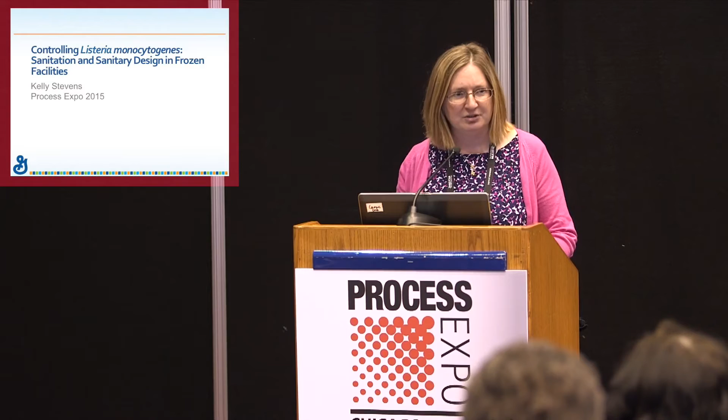It's only an hour, and this is a topic you could talk about for quite a while. So what I'm going to do is try to hit some highlights and share pictures of where we've done a deep dive into these principles, identified opportunities, and share things we've done to improve sanitary design. The reality is many of the systems in our network were designed years before people were really fluent in the conversation around sanitary design. It's a learning journey, about having the right solution at the right time for the right process and equipment you're using, and finding the right solution, but not always the best one. If I had thought differently about how I prepared today, I would have taken us on a tour of the floor as we talk about the principles. But I hope and encourage everybody to ask different questions as you interact with vendors and use a different lens as you're looking at equipment throughout the day.

So we'll talk briefly about sanitation, then about sanitary design principles for facility and equipment, and then we'll have some pictures and get the chance to be a little interactive inside this room.

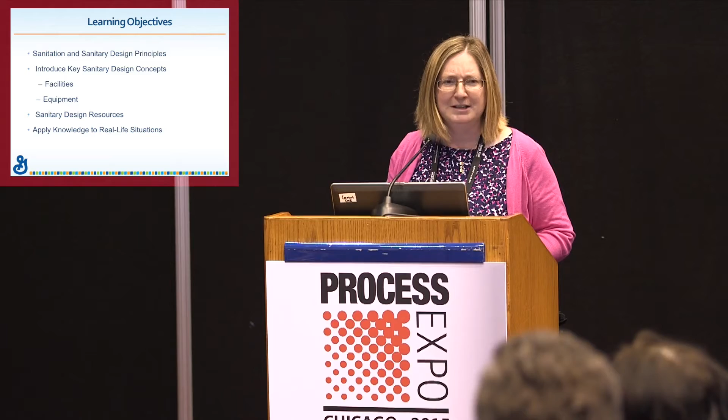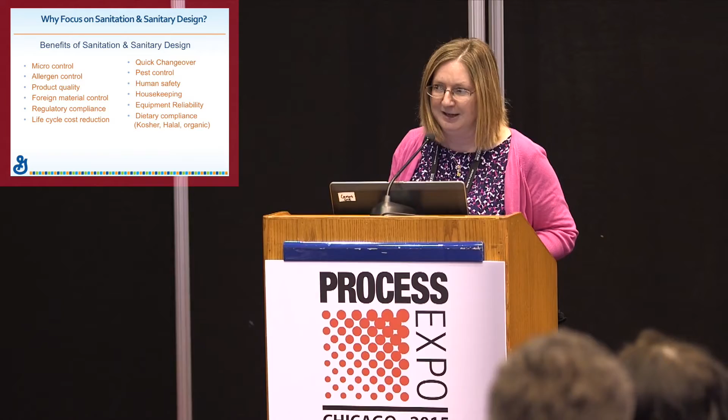I think the big question is, why would we even want to have this conversation? Why do we clean our plants? Why do we want equipment and facilities designed with sanitary design in mind? It depends on your product, depends on your process, but there are a lot of reasons. We'll focus very much on microbiological control today. I'll also talk about pests, because when you find situations conducive to pest harborage, you begin to develop opportunities for microbiological harborage somewhere else in your facility as well.

So let's start with sanitation. We talked about sanitation as we looked at a systems approach for control of Listeria. Sanitation is really all actions dealing with cleaning or maintaining the hygienic conditions of the facility. This can range from the cleaning and sanitization of specific equipment and food contact surfaces to periodic cleaning activities throughout the facility, including the building, the structure, and the grounds.

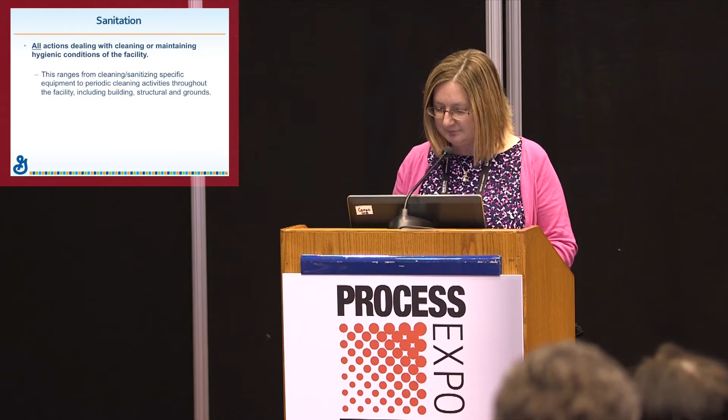We talk about wet sanitation in the 4x4 process. We were joking around during the break about how fun it is to have the hoses and to be able to spray and go at the facilities. And sometimes if you have the opportunity to be there when your sanitation crew is cleaning, it looks like a bunch of firemen sometimes.

You've got some high pressure hoses, really trying to get into some difficult places. Sometimes they're using water to move materials, and sometimes they're using water because they're just waiting for the next opportunity to clean something. But there really is a lot of science that goes into cleaning, and you need to be aware of the materials and the chemicals that you're cleaning with as you look at bringing new equipment into your facility.

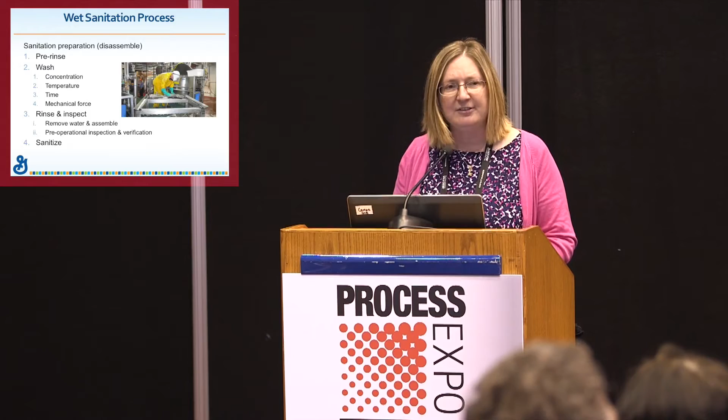We were recently challenged with how could we do 3D printing of replacement parts, and it brought up a great question around whether the material was even approved for use in food contact surfaces, and then how would it interact with the cleaning chemicals that we already had in our plants? So although the graphics and explanations of the sanitation and cleaning procedures for wet sanitation are very straightforward, there's an awful lot of science and chemistry that goes into it, and also a lot of interaction with the materials.

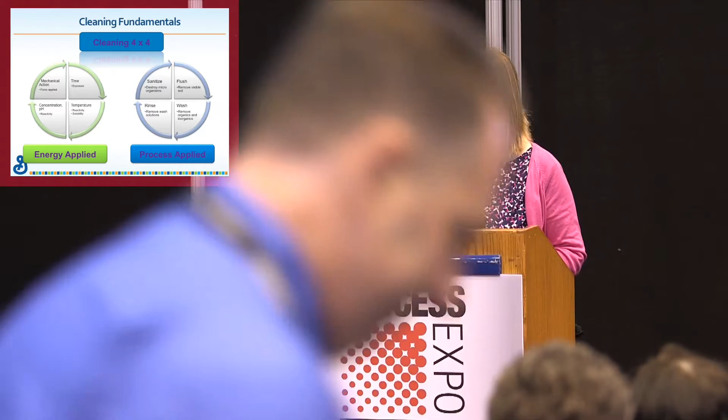Many of us know that when you don't use stainless steel in the facility, we have to then manage some of the outcomes of that. Nothing like that aluminum system that sits in your wet wash area that eventually rusts by day 2. And then how do you manage that chemistry?

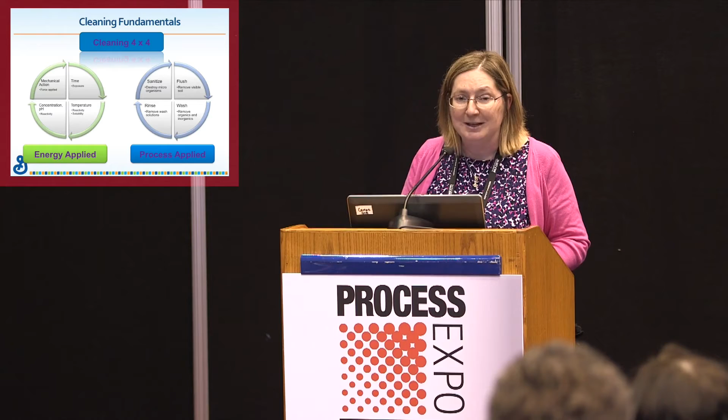So again, it's that interaction of the two, because as I think about putting equipment into my facility, as I think about building a new facility, at the end of the day, I want to be able to clean it effectively, and I want to be able to have a procedure from the people doing the cleaning that is safe for them to execute, and they can do so in a way that's repeatable every time and sustainable.

Hence, that leads us to the importance of sanitary design. I was talking to somebody earlier today about this term, and it really implies that you have an engineer in an office that's very, very clean as they're designing the system. Well, that's not really what it means, right? It's about the application of design techniques to allow efficient, effective, and consistent cleaning of your entire system, not just the food contact surfaces, but the system, the facility, and the grounds.

Some would say if the operator and crew can't see it, they can't clean it. So think about all those hidden surfaces. The microbiologist in me loves to take things apart. The operators hate it.

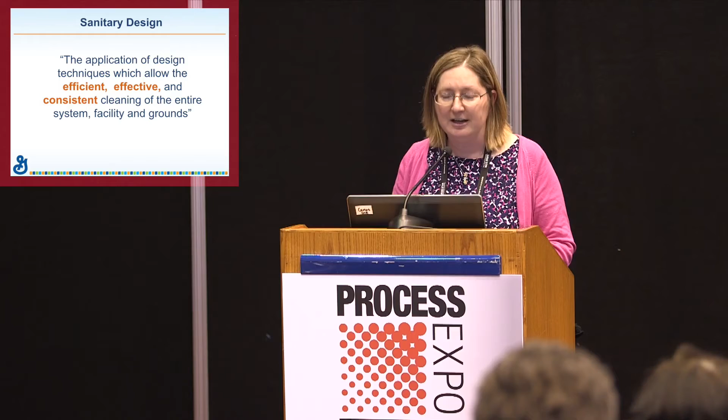So when you think about the fundamentals of sanitary design for both facilities and equipment, the goal is to create that environment that's easy to maintain under the required sanitary condition. We want to start thinking about sanitation at the property line. We want to specify materials that are easy to clean, and we want to design for the expected life cycle of the facility. When we think about putting in equipment, some of that equipment is around for decades, and we still need to be able to effectively clean and maintain it, and maintain that sanitary nature throughout every product that we make on that line.

So the first set of sanitary design principles that I'll talk about today are the sanitary design principles for the food manufacturing facility itself.

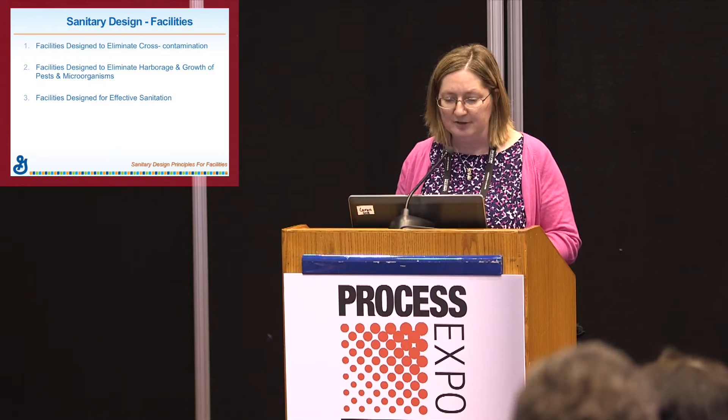So when you study these design principles for facilities, you'll notice there are really 3 themes. First, the facility should be designed to eliminate cross-contamination. We talk about linear flow from raw to finished product. Facilities being designed to eliminate harborage and growth of pests and microorganisms. We don't want the rats, we don't want the lizards, we don't want the birds. As we know, we also don't want the Listeria. And we want it to be designed for effective sanitation, right? People are tasked to do this cleaning, sometimes under not the greatest of conditions. We want our people to be safe, we want the food that we make to be safe.

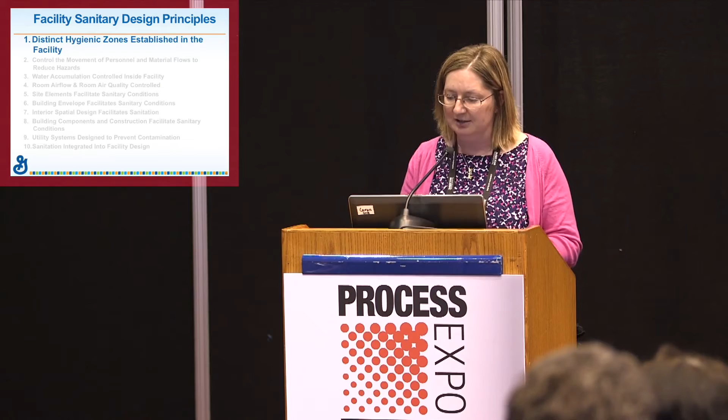So again, we'll use today as a starting point, and I'm going to share some pictures as well. The first principle I'll cover today is distinct hygienic zones in the facility. So when you think about hygienic zones, you think about that movement of materials from raw to finished product. You think about maybe separation of cooked and uncooked, ready to eat, not ready to eat. You think about how you transfer a hazard along that line, movement of people, movement of materials.

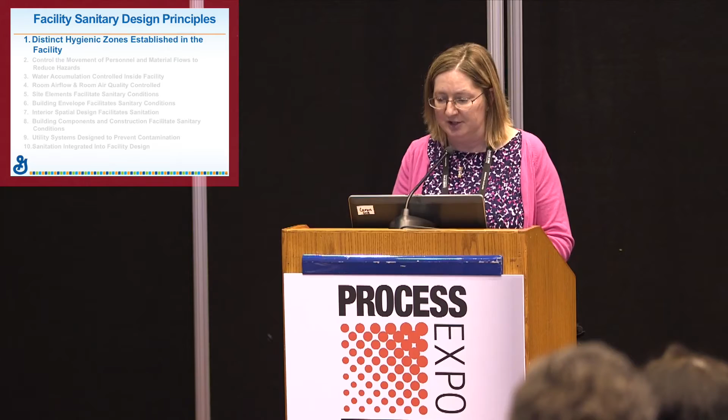Now, as we know, those of us who have worked in manufacturing facilities, stuff happens, right? You're relying on somebody to remember to do this. Oh, and by the way, they got sick and we have 3 temporary people in today. We're relying on people to remember to cover it well, and then remove it in a fashion that will not add to contamination. Is there a better way?

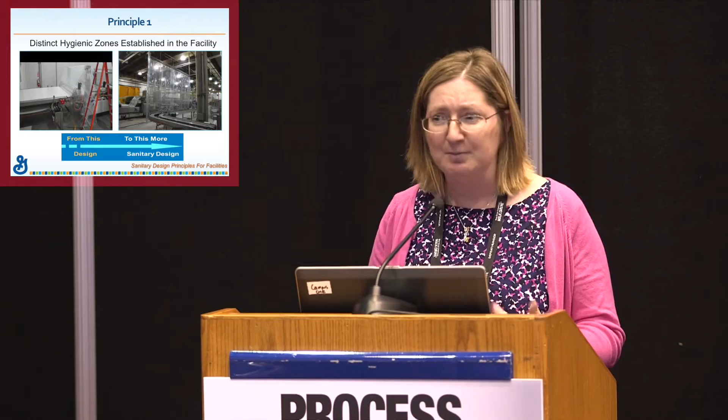Well, the picture on the right is a really good example of a sliding curtain. With a well-constructed side rail, the plastic material provides protection, but it also allows operators to see what's going on both sides, right? People want to know what's going on around them, or sometimes they have a responsibility for both sides. So again, from left to right, you go to a more sanitary design.

The plastic sliding curtain is a good mitigation technique, but there could be better alternatives. It's about understanding what your facility needs, what processes you're trying to run. Another solution could be a permanent wall, again, depending on what the needs of the facility are.

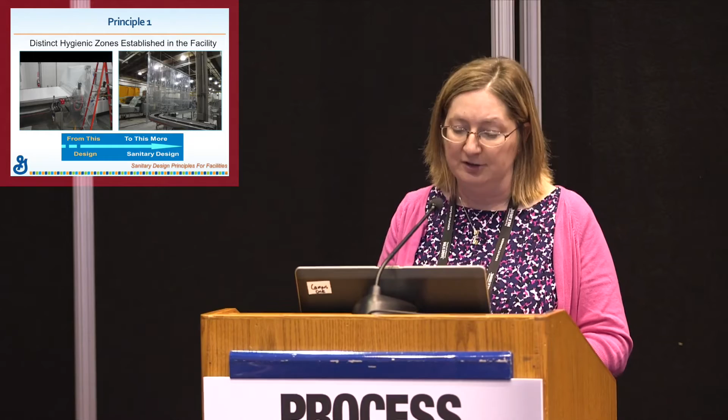But guess what? That dry side's not staying so dry. Those dry hygroscopic ingredients are getting sticky and nasty. Not only is it creating a microbiological risk, it's really hard to clean.

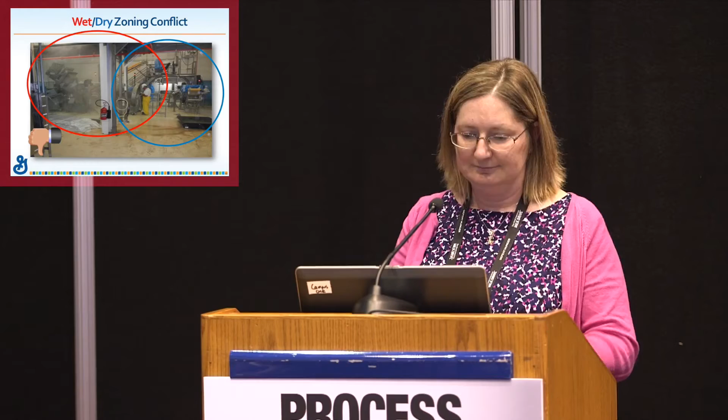The next sanitary design principle I'll talk about today is about water accumulation controlled inside the facility. Now, when I think about our frozen food facilities, these are wet processes. Water is used for conveyance. Water is added post-freezer to help against freezer burn. And there's a lot of different steps involving water.

That being said, making sure we're designing the facility so that floors are sloping appropriately. Has anybody ever been in a facility where you have a floor drain that's high in the floor as opposed to the low point? Really not doing us any good. Water's pooling. That's what this design principle is all about, making sure you're constructing your infrastructure to support the water movement needs and avoiding the accumulation of water.

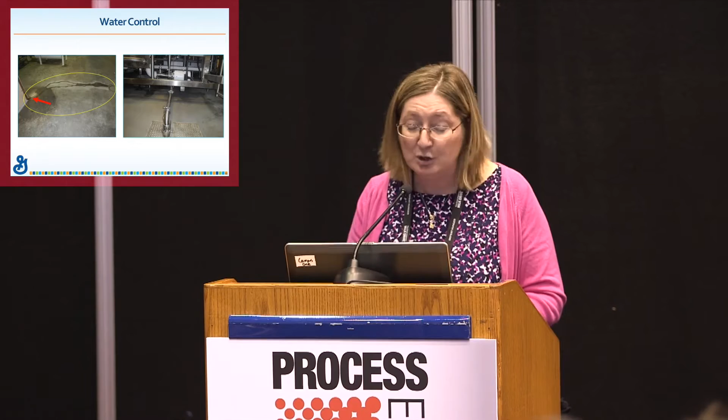Now what you see on the left is probably, as an auditor, one of my biggest pet peeves when I walk through one of our manufacturing sites: the hose on the floor. The hose on the floor that will be used to spray potentially a food contact surface. The hose on the floor that I'm swabbing for pathogens. The hose on the floor where we just saw the puddle and the accumulation. On the right, a better solution, although maybe not the best solution, but the hose is up off the ground and the nozzle is not laying on the ground.

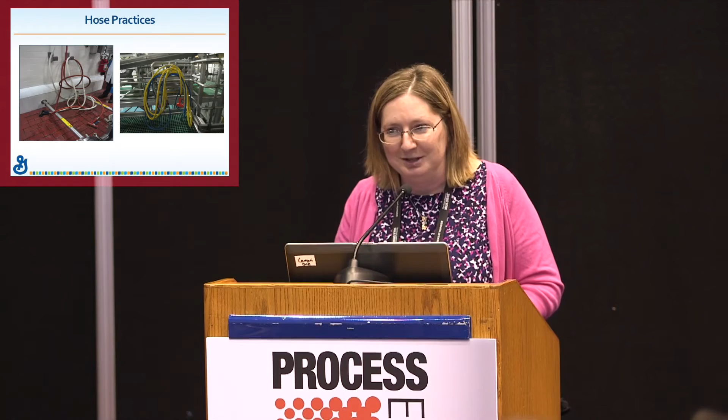People are always surprised when I talk to them about the potential of those hose nozzles being a source of cross-contamination for Listeria, and I've sampled many of them, and I've gotten many positive results back. We throw the nozzles out just as an awareness. When we do the sampling, we throw those nozzles out and change them out. Because sometimes 3 days later, after the corporate microbiologist leaves, people forget what hose she sampled.

Condensation. Every plant I go into, we look for condensation, especially over a product zone. It's really, really hard to manage, really hard to justify. How do you prevent it, and what are the tools and tricks in your design for heat transfer that you're building in when you work with your engineers?

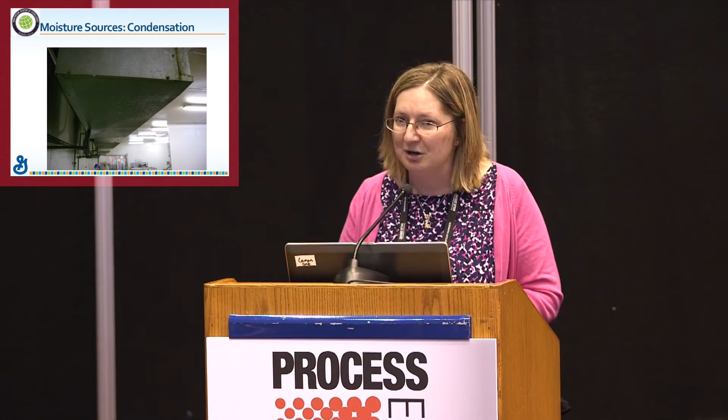Freezers. We talked quite a lot about freezers in the last session. Freezers have been known to be a potential source of cross-contamination for Listeria. As we look at water control, we look at ice buildup, we look at the defrost cycle. Where is that ice all going to melt and go? How do you clean that? Where is it?

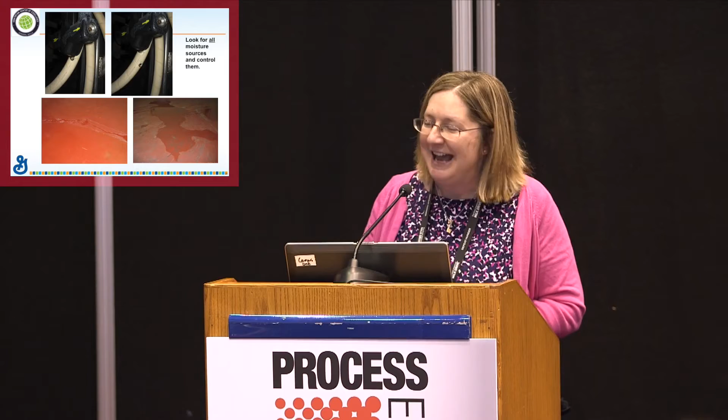And if I didn't talk enough about hoses, we managed to find some leaky hoses captured in the moment. So what you see is not only the hose providing unwanted water to the environment, you see the pooling of water on the floor.

Far away is the drain. If you look closer, as you go to the drain, you might see a crack. Now, what some people will see when they see that crack in the floor in their infrastructure, they'll say, we need to fix that, but I've got 17 other things to fix today. When I go in a facility and I see a crack, I just imagine all the bacteria living in there. My Q-tip barely fits in there, but I know they do.

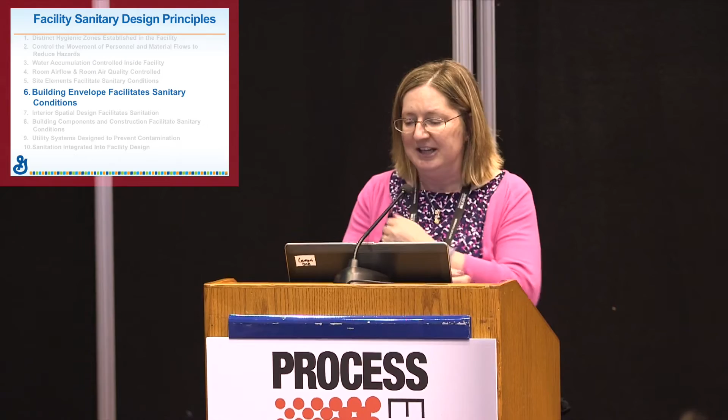So let's talk about the building itself. We talk about designing and constructing all openings in the building itself so that insects, rodents have no harborage, no birds. We want to make sure that those components are easily cleaned and inspected, free of cracks, free of voids, not welds. Welds are fine.

How many people have walked on the roof of their facility? I love going on the roof. So you go on this roof in particular, and there's bird feces. And on the right, you have cooling water. How do you clean the roof? How do you clean your shoes when you go back in the facility? What if you just tracked back in?

I know of a great story about what is really the likelihood of this. I'll share with you a story that happened at a facility I work with where we had a finished product salmonella positive. We were really pondering, where would this happen? How could this happen? We've never, ever had it happen before.

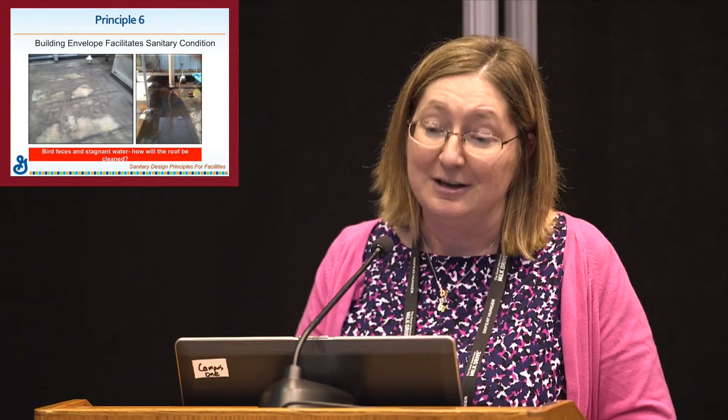Yeah, I saw as I walked in, somebody was producing or advertising a solution for bird control, so I need to stop and visit them on the way out. We want to make sure that the building itself doesn't provide nesting areas and roosting areas. After the experience I've had, I'm especially sensitive to this. The other thing I ran into at one of my facilities is some birds are protected. Once they take up roost, you're really not allowed to get rid of them. I don't want to endanger the species. I don't want to endanger my food. It's a precarious balance.

All right, I'll try not to dwell on birds anymore.

Interior spatial design facilitates sanitation. What does that mean? Some principles covered here are aisles wide enough for maintenance, sanitation, and materials, and sufficient access to clean the building. Can you actually get to stuff?

With production space at a premium, we want to get as much into our buildings as possible. But we also need to be able to navigate around and effectively clean them.

We also want to look at those floor, wall, and ceiling interfaces. Are there areas that can produce or wind up having harborage spots for pests? We focus so much on product zones that sometimes we forget to look up, and we underestimate just how far those high pressure hoses can spray. They make it to the ceiling, and what they bring down is sometimes really not what you wanted.

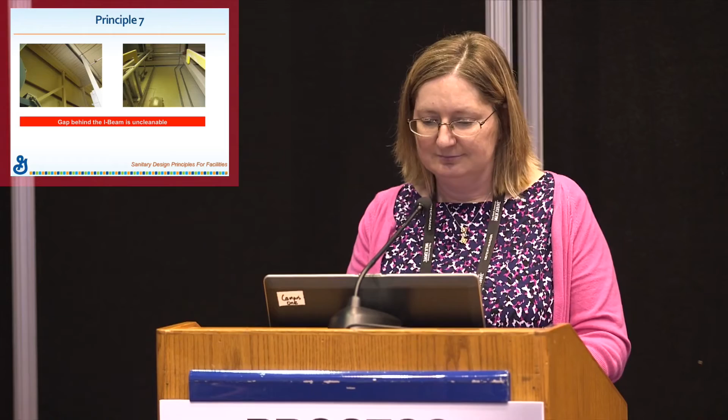So remember to look up as you're walking around the facility and look for those areas that are harborage points for pests, product, dust.

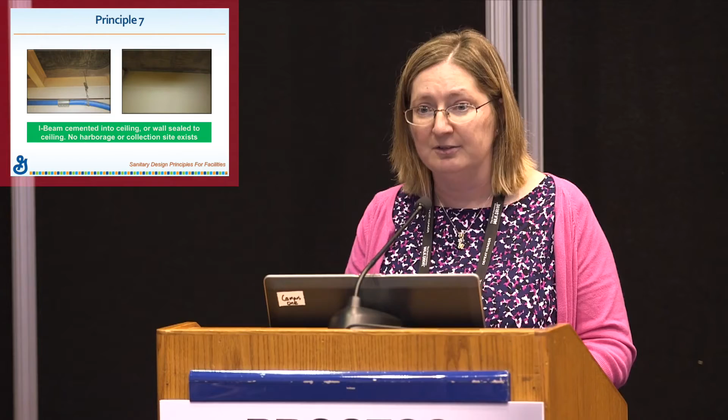In this picture we have some nice examples of those interfaces. You see the I-beam cemented into the ceiling, the wall sealed to the ceiling. Better design. Initial cost is probably going to be a little bit more, and your project engineer might not like it, so you have discussions around what it takes to clean. Long-term maintenance costs are probably going to offset the cost of bringing in a contractor to clean it under the other conditions.

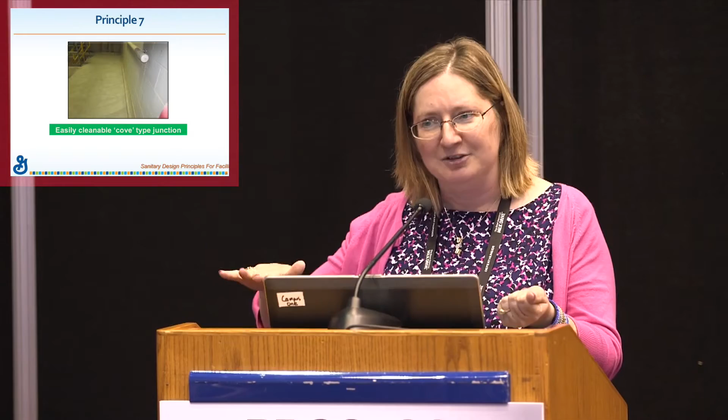In many of our incidences where we've really struggled to find the root cause, we've peeled back some flaps and found that harborage was getting wet during sanitation and then winding up in the drain. Caulk, caulk, caulk.

Utility systems designed to prevent contamination, right? Our surfaces should be cleanable to a microbiological level. Are they using appropriate materials? Is there access for cleaning? Is the water going to the right place? Back to that water theme again.

How about the lighting? Can you actually see? Is it bright enough? Anybody ever been in a production facility where it was a little bit like a cave and you wanted a spelunking light? Or how about the facility that did a great job adding additional lighting, but it was glass, and it didn't have the appropriate sealant to make it shatterproof. So good reminder around our glass and hard brittle plastics as well.

Done with the best of intents, right? They needed to build a wall because they wanted a physical separation between two lines. Great idea. They were moving away from that temporary plastic sheeting. Nobody actually walked out there to see where the drain was. The wall eventually started to erode, and needless to say, there was another harborage point. The first reaction was, well, it's a wall, it's really hard to move. And once you have Listeria in there, it's another conversation.

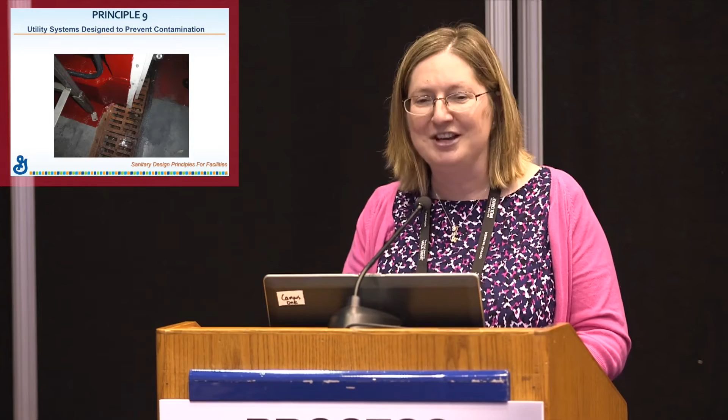So that's our very rapid tour of facility design, making sure our facilities eliminate the potential for cross-contamination, eliminate those harborage points for growth of pests or microorganisms, and are designed so our teams can clean them.

So let's move to equipment, and we are in an equipment playground.

Again, sanitary design for food processing equipment is an easy concept, right? We should be able to clean it. As we all in this room know, it's really challenging to implement.

The design principles focus on two key parameters: constructed to ensure effective, efficient cleaning of the equipment over its entire lifespan, and designed to prevent microbial or pest survival, growth, or reproduction on both the product and non-product streams. Simple enough, right?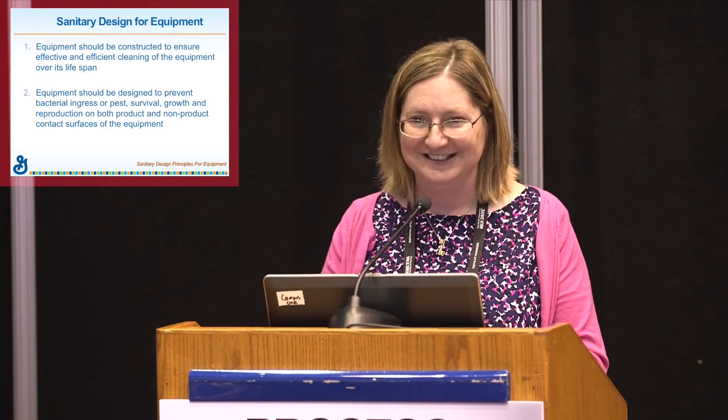So again, there are 10 sanitary design principles. I'm going to focus on 3 of them today. Each of these principles have multiple components, so you might want to get your checklist out. I'm not going to cover them all, but there's lots of great reference material out there.

Is it cleanable? That's the very first question we ask. Equipment should be constructed so it's cleanable to a GMP level, meaning biological, chemical, and physical. We want to make sure that when we bring this equipment in, we can effectively get our material off of it.

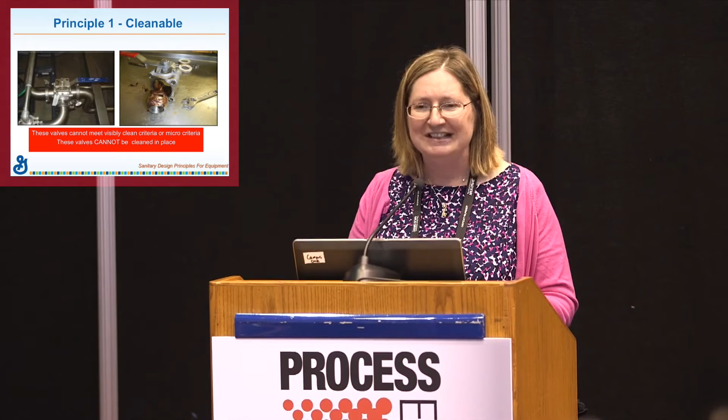Butterfly valves, they are so fun, right? They are great, they serve a great purpose, but again, you need to tear them down in order to get to the components that are going to cause you problems later.

And it's not easy. My team's always lost a part, and my maintenance man was mad because we kept using the same part over and over again. So that's when I said, well, maybe we could put an inline valve in that's cleanable. How many years would that payback take? There are sanitary valves that can, if you have a clean-in-place system that you can use, and they work really well.

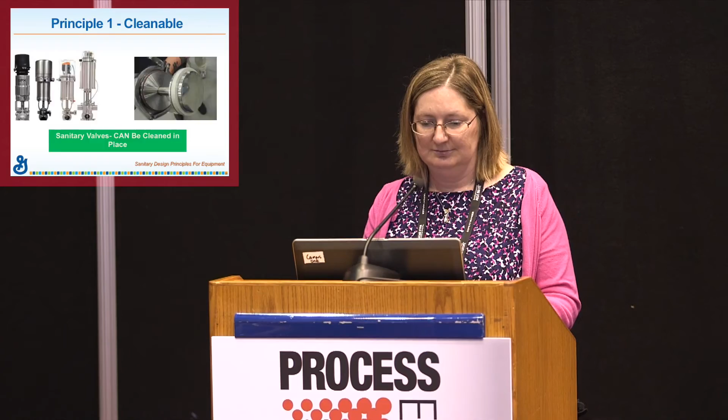However, when we asked maintenance to take this apart, we found a lot of debris post-sanitation in an area that we didn't expect. And in this particular case, it actually was an allergen issue. So we had to do quite a bit of work to remediate and redesign this tank and put interim procedures in place. The really hard thing around this particular site was the tank size was so large, it was a confined space. So we really had to think through not only the food safety, but the human safety as we were addressing this issue.

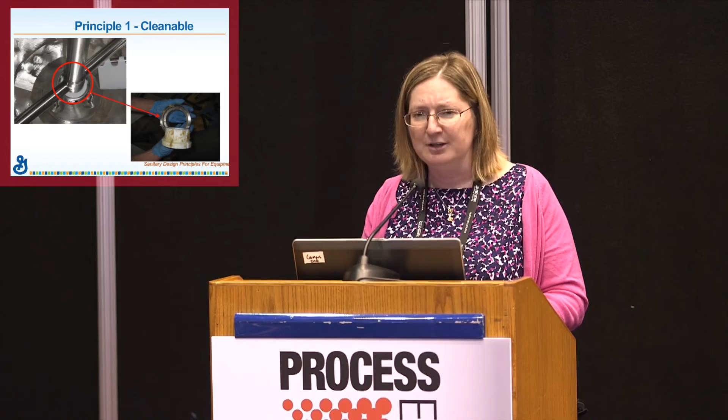Moral of the story is, every once in a while, take things apart. In this example for Principle 1 in Cleanable, it's about the scraper bar. On this particular scraper bar that you see up top, bolted in place, you need tools to take it off. Not a great design. When you take it apart, where those mated surfaces were, all kinds of food in there. And let me tell you, it smelled. So, not a great design.

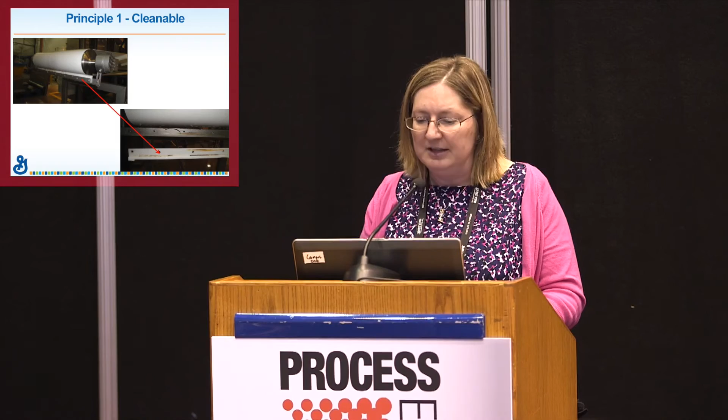In this picture, we have the alternative solution that we went with. It's a snap-in, snap-out scraper blade, no tools required, so people can get in there, get it out, get it clean, and get it back in place fairly easily. Still a little bit of debris that we found in there, but not nearly at the level of the other design. With the ease of it being able to be taken apart, it was a really good solution for our teams.

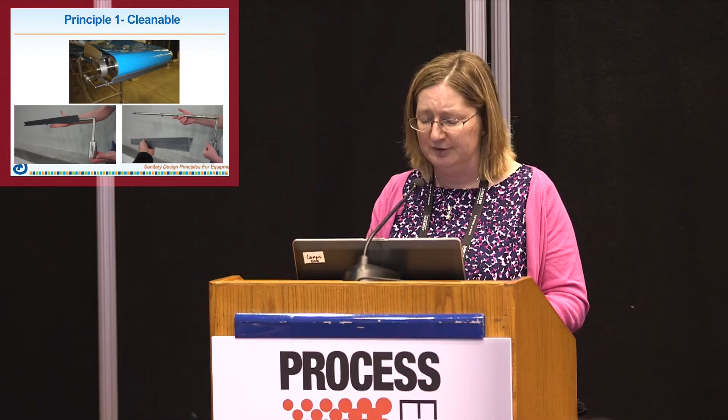All right, let's move on to the next principle: accessible for inspection, maintenance, and cleaning and sanitation. Pretty obvious, right? We got to be able to inspect, we got to be able to get to it.

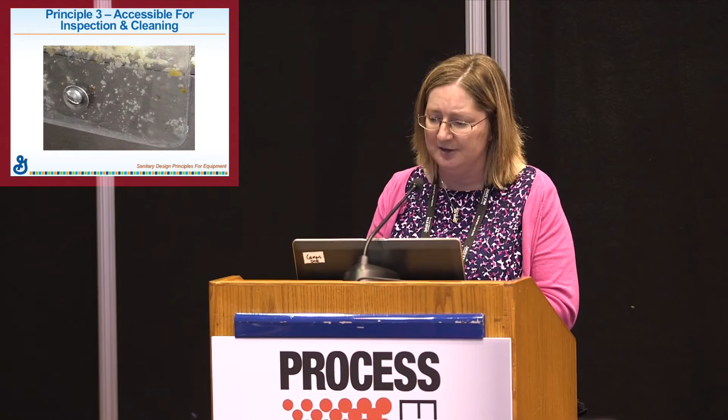So great solution, right? It's clear, I can see it. I can see the debris that's there. Maybe some mold growths, we got some pretty colors of the rainbow going on there. It's a great example of what we see a lot in our facilities: two different surfaces mated together, joined together, create a harborage point. Not easy to take off. You need to carry that tool around with you.

So again, was that the best place to put that particular unit up? They maybe could have put it somewhere else.

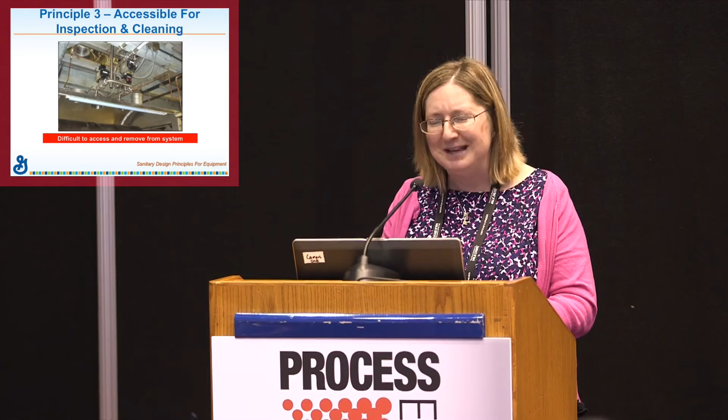Hollow areas eliminated or sealed. This one is so easy, right? It's a great one when you're walking through a facility to really look at what are some things I can get at right away. Those hollow areas of equipment should be eliminated wherever possible or permanently sealed. So you think about bolts and studs, you think about nameplates being continuously welded.

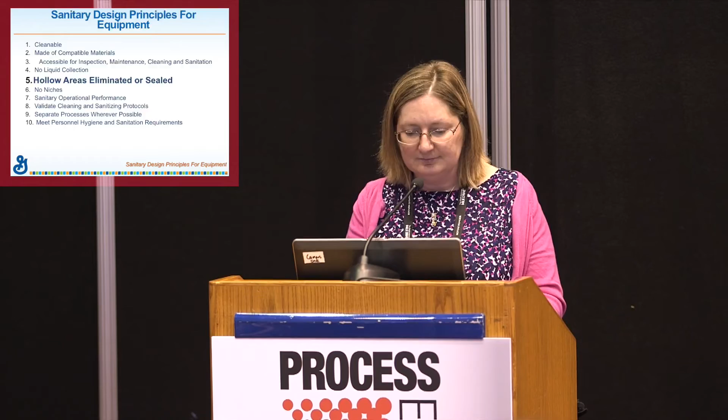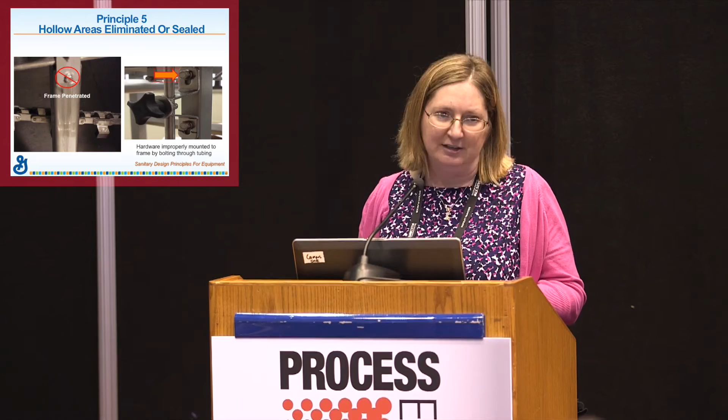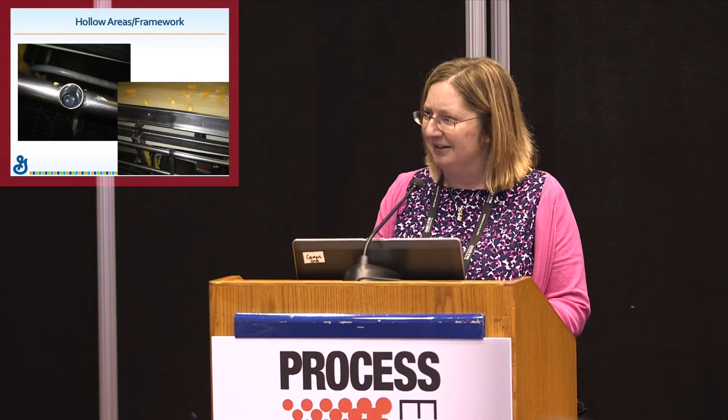So when you think about equipment, you think about cleanable, you think about being constructed to ensure effective and efficient sanitation, preventing recontamination. You want to prevent the harborage area of these pests, these microbes. Again, it's a really easy concept, but it's really difficult to implement.

So, as we think about these principles, I encourage you to find the checklist, to read them, study them. I would do it as you're walking through the show over the next couple days, as you're talking to equipment manufacturers. Ask them what they're doing with sanitary design for their equipment. How are they implementing it? Look in the equipment that's here today. Look for those hollow areas. Look for those pieces that need to be disassembled using tools. Ask them how they clean it. Ask them if they've ever tried to clean it.

I am on a personal mission at my company that every project manager, I want them to clean their own equipment. I am on a mission. I'll take one, but as a start. Because as they put it in, they need to understand the ramifications for the next time they design.

All right, so I've talked a lot. My throat's getting a little sore, so I'm going to turn this over to you guys now, and I'm going to share some pictures, and I want you to think about design or execution. We talked about sanitary design principles for equipment. We talk about execution of the sanitation. So let's see what we see in the pictures.

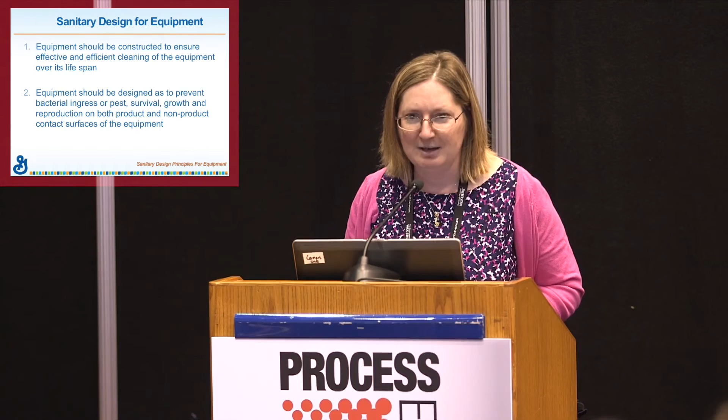I'm being told I'm not loud enough. Oh, we have a microphone. Excellent. All right, first picture, what do you see? I'm sharing them. Come on. What do you see in this picture? Donna will call on you. There's no wrong answers. No wrong answers.

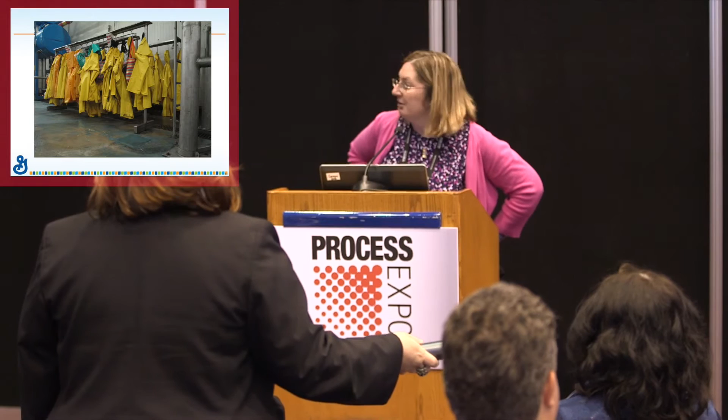So you see the raincoats and what else? Use the microphone. Water might drip and collect on the floor. They're very nicely organized, aren't they? Right, they did a nice job. They have some personal belongings. Oh, somebody in the back. They're touching the ground. They're touching the ground, yes.

Design or execution. What do you see in the background there? Anybody see the floor drain? They're hanging over the floor drain. How awesome is that? So this is the uniform that our teams are wearing to clean the equipment. They're now very nicely hanging, some touching the floor, some touching what appears to be personal materials, and who knows what's going through that drain.

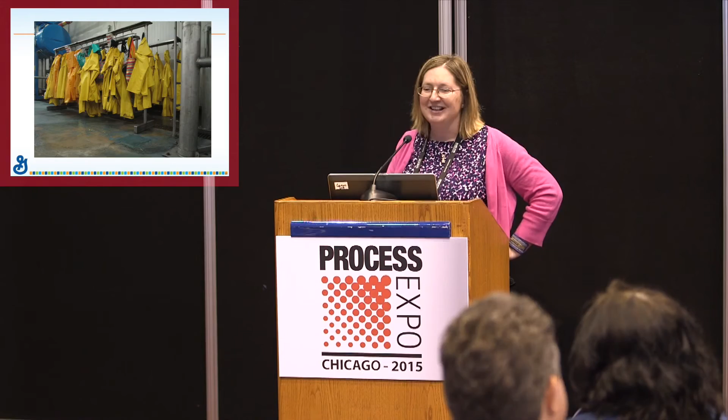Great, good. All right, let's try another one. What do you see? Design or execution? Oh. Any guesses?

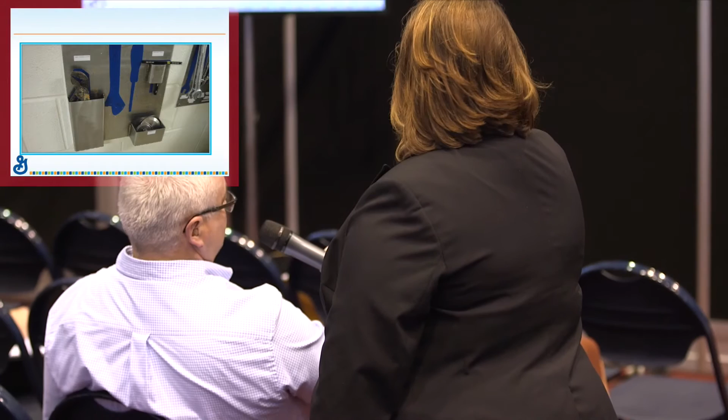It's a shadow board missing some tools. Yep, a shadow board missing some tools, so hopefully somebody's out using them right now. Right, it's very clear, poka-yoke, I know where to put it. You've got pockets for harborage where the tools are stored. Yeah, how do you clean that little square out? That wrench looks a little dirty, doesn't it? Maybe my tool didn't get cleaned before I went back. Good. All right. What do you see?

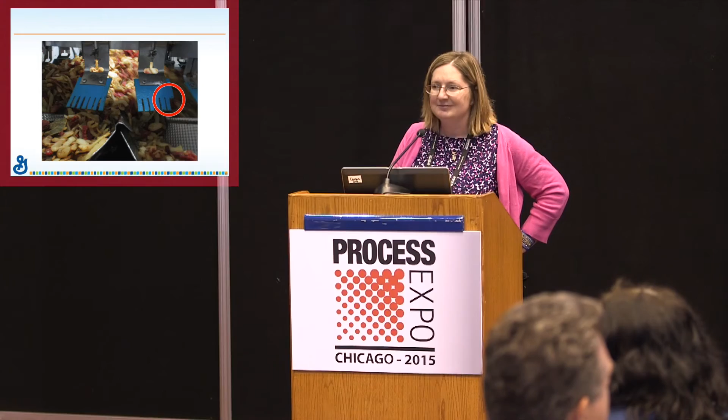Those little blue feet that can't be taken off because they're screws above ready-to-eat product. And I see the little red circle, which means one of the little feet got broken off, so it's in product. You probably ate it when you ate those chips.

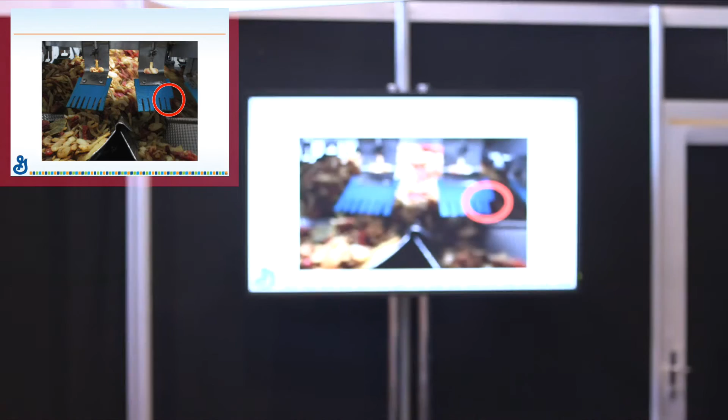And then you've kind of got the area, the ledge where old chips can sit up there, and drop into good products. So you have lots of contamination points.

Awesome, guys, great.

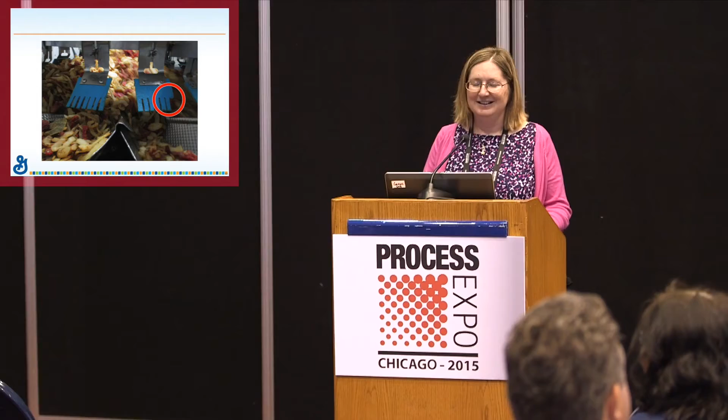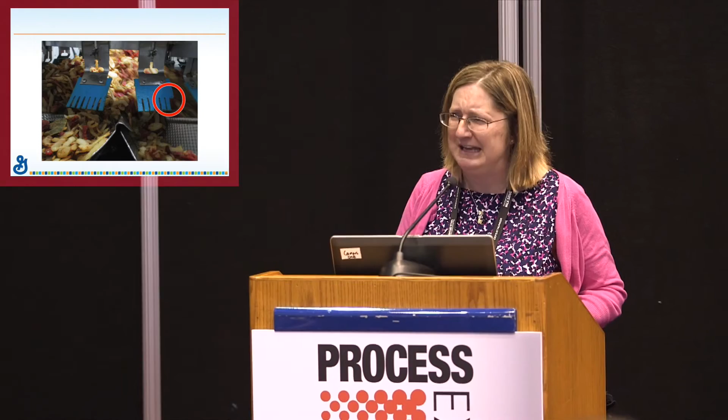Our sanitation teams, they work really hard. We were talking about this with Marty during the break. If you've done sanitation, you know it's a hard job. It's a hot, sweaty, dirty job. And it's a job that's sometimes more of an art than a science.

All right, what do you see in these pictures?

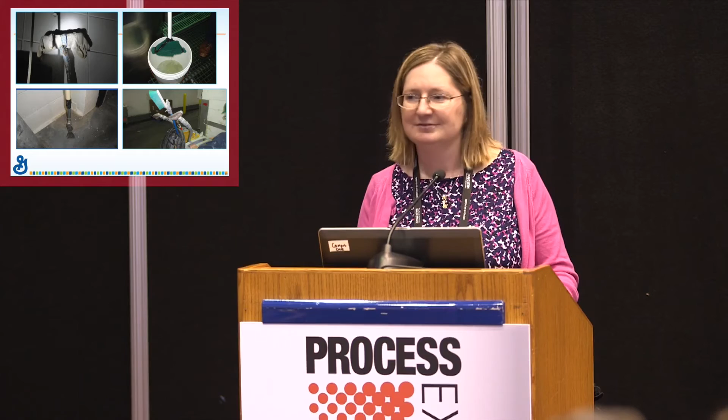What do you see in this picture?

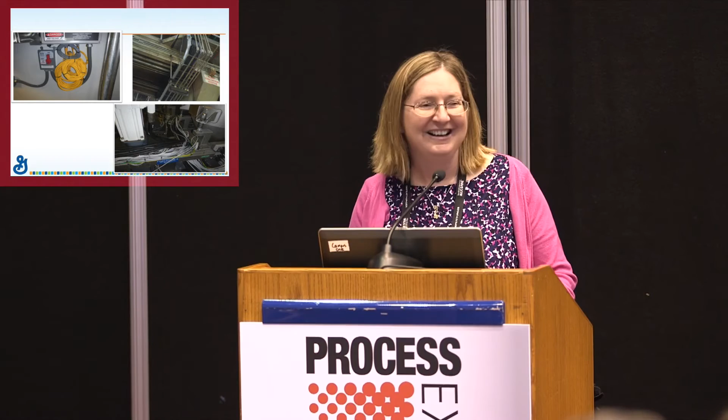All right, if somebody can help me understand this picture, that'd be great.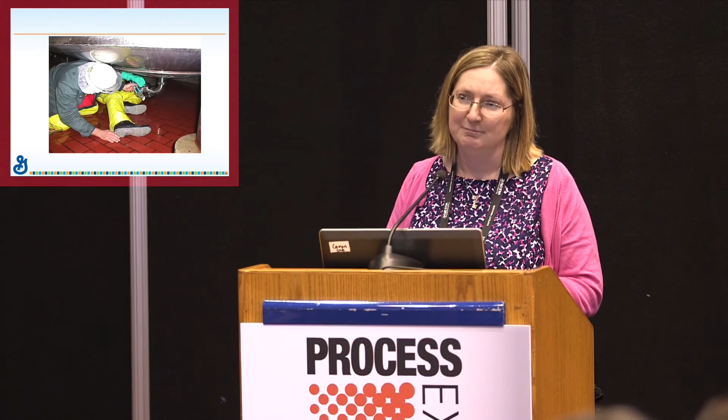Although I would say you can also go and look at your existing assets through these lenses to say, where can I improve? It's also a really good opportunity to really familiarize yourself with the tools, with existing assets, so that you know how you want to do it in the future. Use all of your resources, and at the end of the day, I think there really is a lot of value that comes from this conversation. The better we get at sanitation and sanitary design, the better we are prepping our plants to make safe product every day.

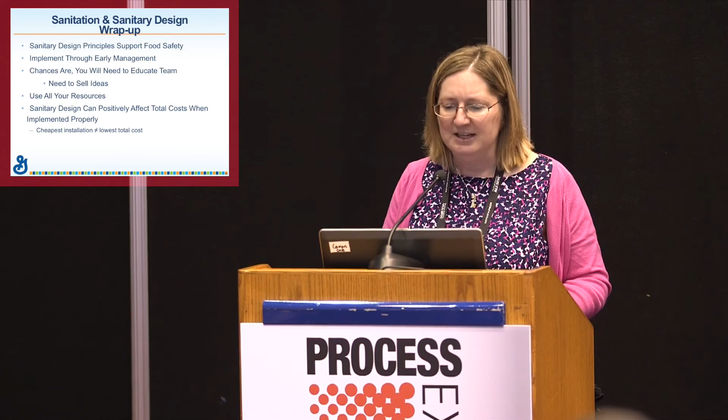Lots of reference materials out there. I encourage you to use them. Again, combination of sanitary design, sanitation execution, effective, efficient, and sustainable. And that's all I have for you today.

All right, do we have any questions for Kelly?

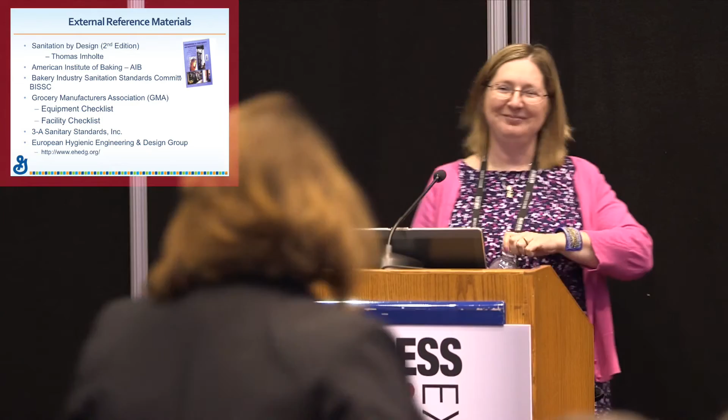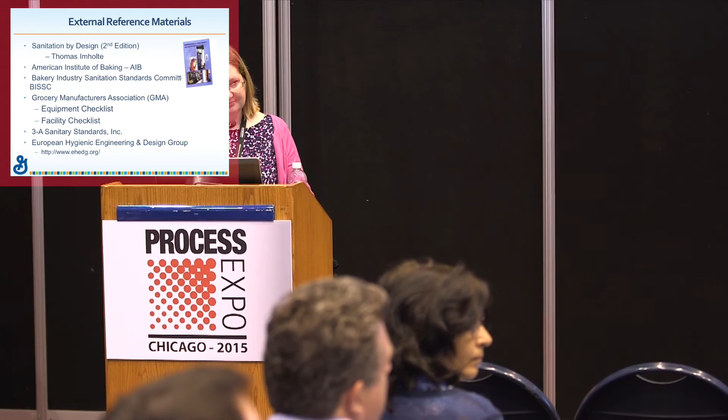So Kelly, your examples were wonderful. You could probably find them in any manufacturer's plants. So the question I have back to you, I realize you're on the quality side, but how do you take these observations from factories and integrate them into both the packaging equipment designers' standards as well as General Mills standards? There has to be a way that you see this one-off. You talked about creating a sustainable process to eliminate that, but part of that is to make sure it's a part of your design and engineering standards. So talk about that a little bit.

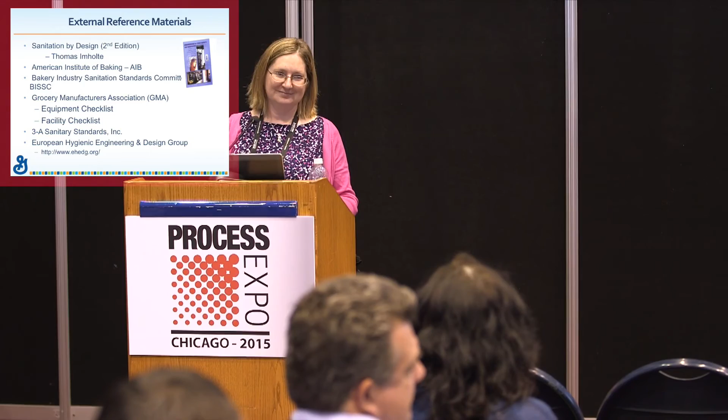Yeah, it's a really great question. As you look at these standards and the understanding and implementation of them throughout, it really starts with the people who are designing equipment and the expectations that I have as a customer for that equipment, to ensure that we're talking the same conversation. So in my role, it's really important that my best friends are engineers, and I have to learn to talk a different language with my engineering team. If I go in and say, hey, check out how much Listeria I have, they're going, what are you talking about? Well, let me help you understand the risks and implications of not being able to clean effectively. It not only has a regulatory risk, it has a food safety risk, and here's my labor implications. By having those conversations and partnerships, that helps us design what our criteria are inside, what our needs are for a wet system and a dry system, and really start putting it into our purchasing contracts.

And design reviews. We are doing that, yes. Great. Next question.

I was wondering, we've been seeing a lot of antimicrobial treatments to floors, walls, things like that. Do you have an opinion on that? I mean, is it working? Is it just kind of hype? What do you think as a microbiologist?

One of the things that we talk about is what's the longevity of that treatment, right? Totally understand and get the science behind the materials that they're using, absolutely have antimicrobial nature. But how does that stand up to repeated washings every day for the life cycle of the facility and the equipment? And we also have to, when you talk about floors, layer in the human safety risk of what that does to the slip properties and how people are moving through facilities. So that is the data that I haven't seen yet, and until we see that, we haven't done a lot of traction in that area.